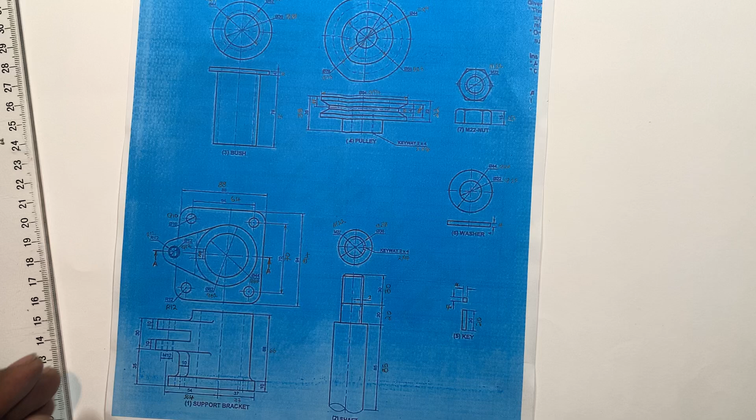We are still on grade 11 engineering graphics and design. So one of you guys sent us this problem, so I did try to print it. I'm replying a little bit later because I was struggling with the dimensions, as they are not clear enough, but I've managed to get them.

So this is it. Even the question, my sister, you didn't send us the question, you just sent us this one. So we'll assume, and according to my own experience with this particular one, it's going to say draw a full sectional front view as well as the top view, and this one is given in third angle orthographic projection.

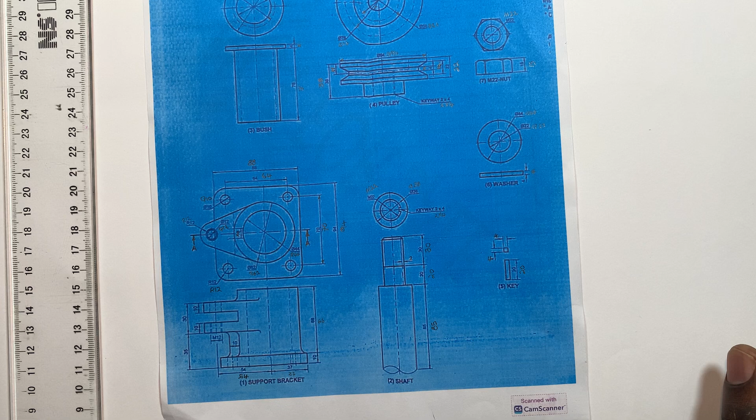Which means the top view is going to be on top of your front view. Are we together? So we have to assemble, and after assembling, we draw the outside top view. When you are drawing this, it is advisable to draw them simultaneously. Understand? Your work is going to be simple when you draw them out simultaneously.

So how am I going to start? I'll simply start with the horizontal construction line like this, our starting point, just the horizontal somewhere here. Just somewhere here. And then from there, you can just get the vertical center line.

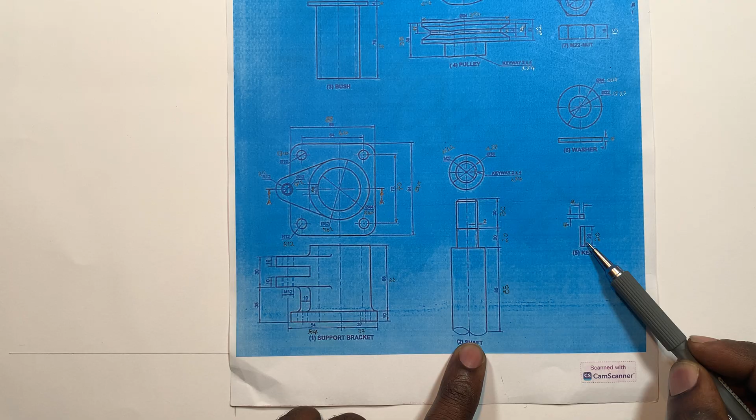So we are given the front as well as the top of item 1, which is the support bracket. Item 2 is the shaft, this is the front, this is the top. Item 5 is the key, this is the front, this is the top. Item 6 is the washer, this is the front, this is top. Item 7 is the nut, this is the front, this is top. Item number 4 is the pulley, which is the top, which is the front. Number 3 is the bush, which is the front and the top. You understand?

So we are going to concentrate on the front for the front view. Which means when you are drawing the front view, this is the one that you're going to draw, this is the one, this is the one, this is the one, this is the one for the front view. For the top view, we'll be drawing this one, that one, this one, as much as you can hear the word top view. So now we are going to start by drawing this front view exactly the way we see it.

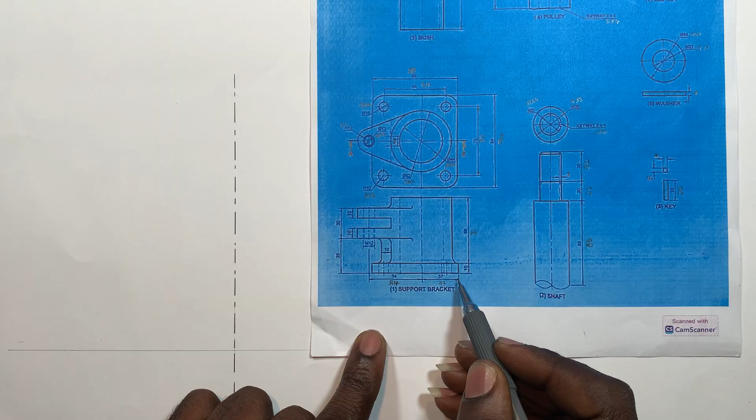And then, like I was saying, this vertical center line is this one. So from the vertical center line towards your right hand side is 37. Yes, so I'm going to record 37 from here to this side. So 37... 35, 36, 37 is right here. So 37 is this one, isn't it? Where my 37 is, I can just have a vertical construction line, faint, like this.

Then now from here till here, 54. 55, I'm looking for 54, which is this one, from your center to this side. There's my 54, isn't it? So I can just have a vertical construction line again. Okay, so double check this 54. What does it give you? So you have to be careful, my friend.

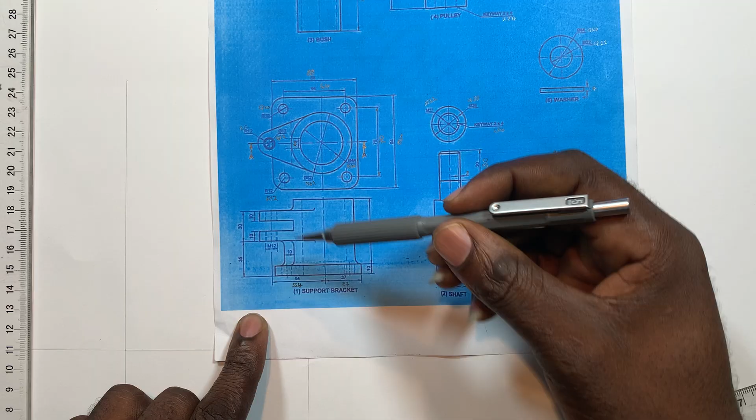What does this 54 give you? It's not giving you this one from here till here. So it's actually giving you the center of this. It's actually giving you that center. So be careful of that. It's giving you that center. Are we together? So from here till here is giving us what? That one.

So in order for us to get this point from here till here, so that we can even draw our base solid now, we have to come and say from where your 37 ends, which is this one, isn't it? Then record 88, which is that one from here till there. So be careful of that.

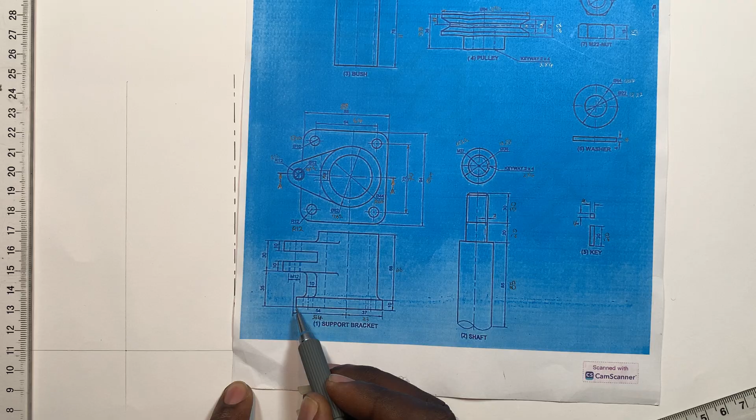You understand? Let me repeat, this 54 is not actually from here till here, it's actually from here to the center. The center of what? The center of what we see in our top view. Are we together? So the dimension from here till here is where your 37 ends, and go back with 88, which is being given on top of there with 88. So 88.

This is 88. So I'll mark it as 88. Then I can have a vertical constructional line.

This means now I can have this one solid. From here till there, as much as I can see, it is solid from here till there. Remember, this is an assembled drawing.

Now I can go up with the thickness of 10 millimeter. You can see 10 millimeter. So go up from here. There is my 10.

Once I get to the 10, just have a horizontal constructional line and solid here from here till there, and from here till there. I believe I will have to erase here because there is something that's supposed to be fitted in between.

But for now, let's continue with the shaft. So we are drawing the front view. Firstly, approach by drawing the skeleton, the outer part of your item 1.

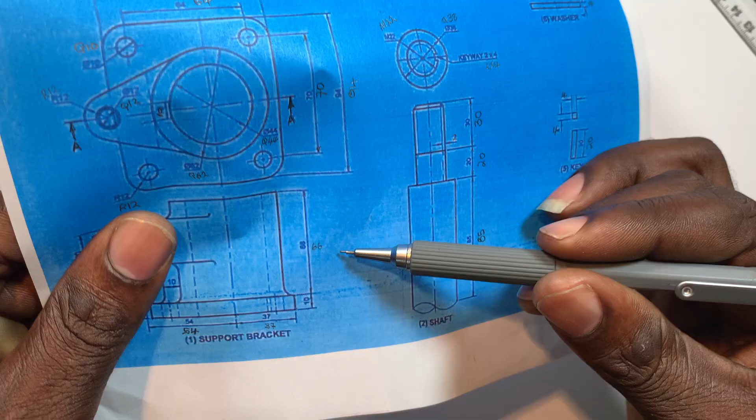So where are we? We are right here. So from here till here is 10 millimeter. Where 10 millimeter ends begins 66. This is 65, 66 is right here.

This is 66. Where my 66 is, I can then just draw the horizontal constructional line right there. Then after that...

What's going to be fitted here is going to be 66. Then what's going to be fitted here? If I'm having this diameter, remember I normally say you correspond to the dimension as well as the shape.

To say this part indeed is fitting there, you firstly look at the shape of that particular item you want to fit into that other one, and you confirm with its shape. So what's going to be fitted here?

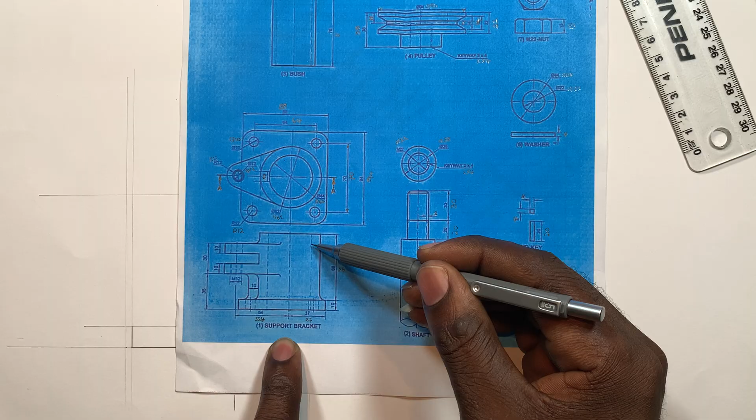Remember, if we were to just draw the front view, the sectional front view of this item 1, this was going to become dark, this one was going to disappear, this one was going to disappear, this one will be dark, this one will be dark.

These are hidden details, isn't it? From here till there, it's going to disappear. From here till there, it's going to disappear. So you don't even draw those ones that will disappear.

By tracing the cutting plane of AA, this one will disappear, this one will disappear. So this one will be dark, this one will be dark.

Then my question was, what is it going to be fitted there? It's going to be item 3. Item 3 will take the front view of item 3 and come fit it right there. So let's confirm with the dimension of item 3 to say indeed it's going to fit there.

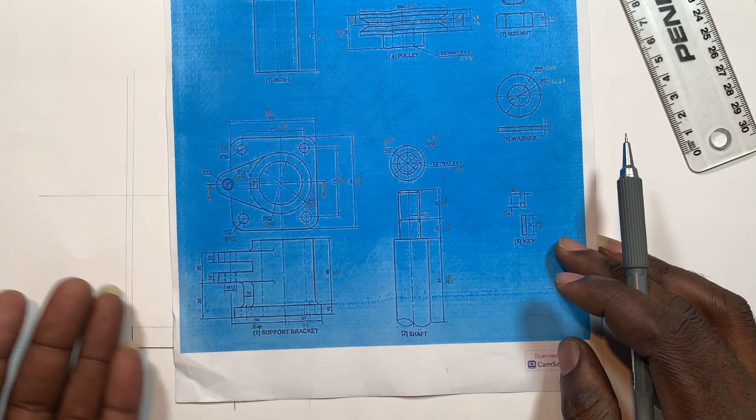So the height from here till here is 76. From here till here is 66 plus 10, which means 76, isn't it? So indeed the height of item 3 is going to fit there, because from here till here, the height of your bush is 76.

So from here till here is 66 plus 10 millimeters, which means 76, which corresponds with that. Are you following? So that is why I keep saying 2 or more things must agree with you to say indeed it is fitting. Okay, how about the internal diameter of this one?

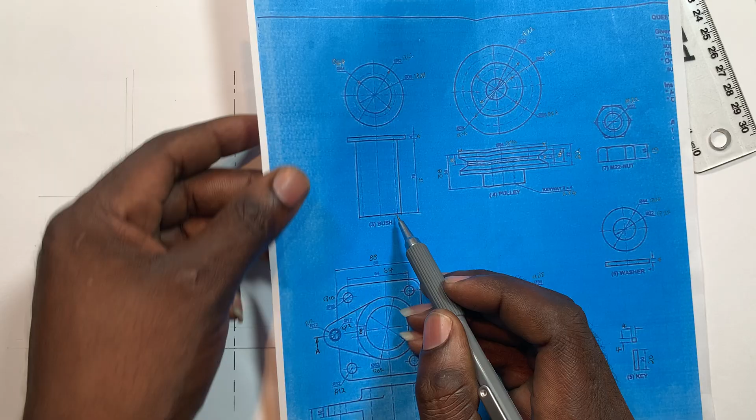So from here till here is diameter 44. So in item 3, do we have diameter 44? From here till here is how much? It's that one that is in hidden, which is the same 44.

Indeed, item 3 fits into item 1. So that's how you approach assembly drawing. If it's like that, then double check that 10 millimeter.

That's not 10 millimeter, it's 4 millimeter. So that 4 millimeter is going to be above, it's going to be above. Which means I can then say this is 5. I'm looking for what? For 4, which is this one. So where is my 0?

It's that one. So I can just have the horizontal constructional line. Then after that, this one from here till here is which one? Is going to be that thickness, or the head of our item 3, the head of the bush, isn't it? So it's of a thickness of 4 millimeter.

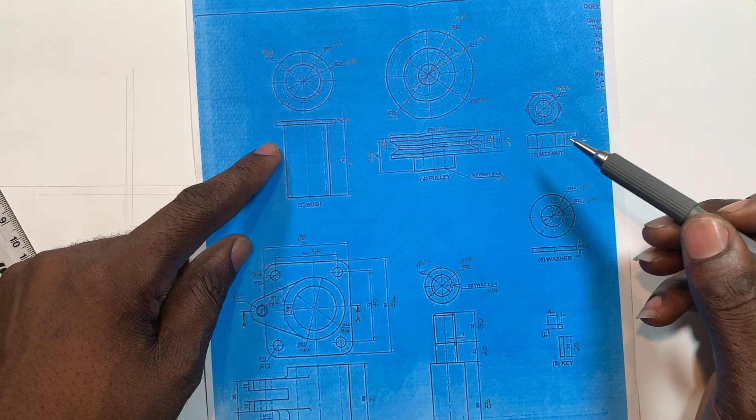Okay, so what's going to be placed on top of that? It's going to be our item 4, into 3. So we'll be taking the front view, isn't it? So the height of item 4 is 38. From here till here is 38. So which means I can record the 38 right here. This is 40, 39. I'm looking for 38, which is that one.

That one, so then I'll just mark it 0. This is 0, and then I go horizontal. If you double check, or if you notice now, we are busy dealing with the horizontal dimension.

We want to get the correct height of the whole assembled part of item 1 - I mean, of the front view, so that we'll then draw the top view together with the front view simultaneously. So what's going to be fitted there now in item 4?

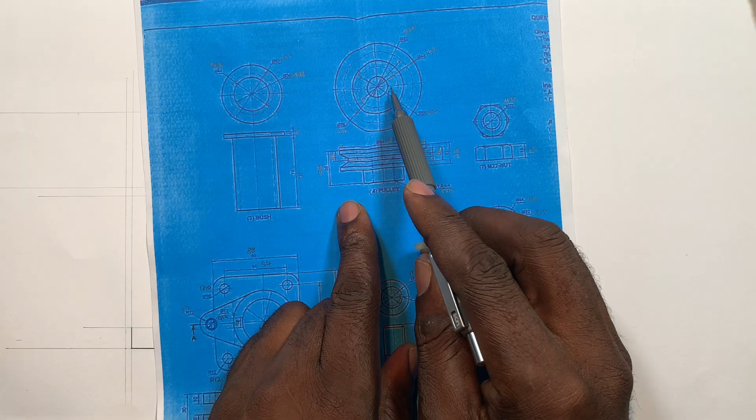So remember, if we cut like this item 4, we put the cutting plane here. So from here till here, it will disappear - you don't even draw it. From here till here, it will disappear, from here till here, it will disappear, from here till here, it will disappear.

Understand? Like as I was saying, this one from here till here will be dark, dark, dark - remember, it's hidden. So guys, if you are sending us a problem, make it a point you are sending us a clear picture, so that we don't struggle with a lot of dimension and hidden lines.

You understand? Okay, so now when we put there, there is a washer. The washer will be fitted in there, and then on top of the washer there will be a nut. So the height of the nut, from here till here, is what?

Is 38, isn't it? So from here till here, at 38, I can just let me extend this vertical center line of mine. And then where is my - let me put 40, or 30 - let me put 35.

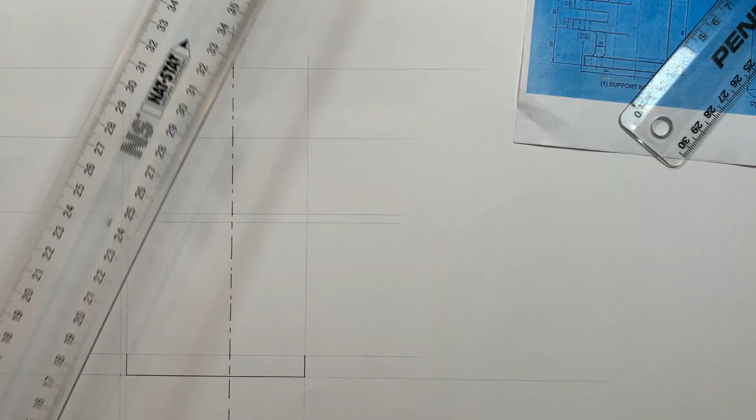So there's my 35. Then on top of where my 35 ends begins my top view. So this is my 35. So now on top of this 35, where my 35 begins, begins my top view. So let me just have this vertical center line extended just a little bit.

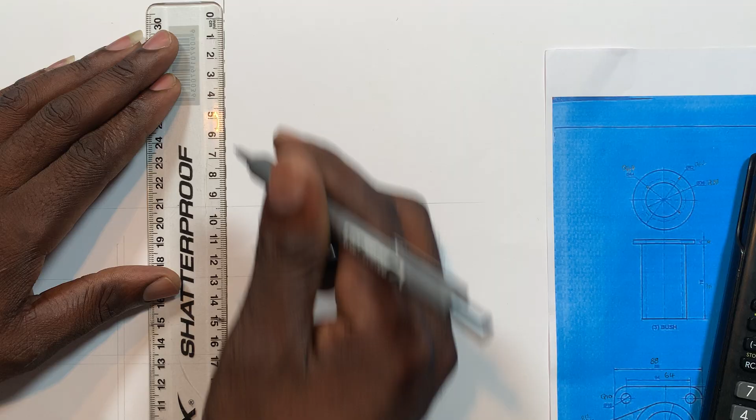Okay, so now what can I do now? I will then say from here till here is 94 millimeter. When you say 94 divided by 2, we are getting 47, isn't it? So 90, 90, 95, this is 94. Then I mark at 0, then I mark at 47.

Then I can have the horizontal constructional line and the horizontal center. Okay, so like as I've said to you, we will be drawing them simultaneously. So from here till here is 94, which is from here till here. Understand? So I can just extend this line of mine faint like this, as well as this one faint like that, as well as this one faint like that, just extending them till there for my top view.

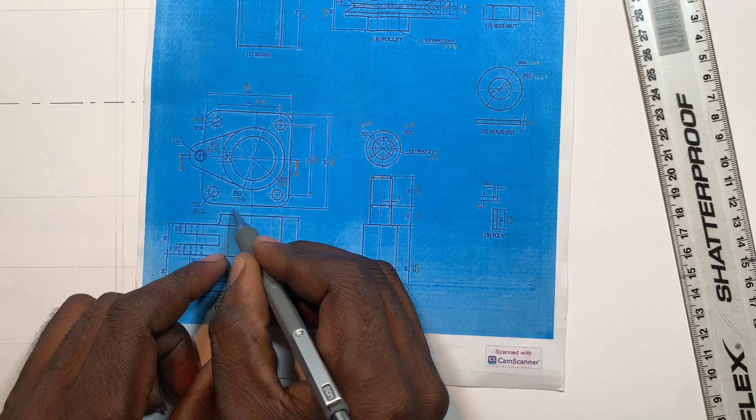Okay, so now I'll draw this outside part of my top view, and double check this one. So this one tallies with that, isn't it? Okay, so which means now I can have this corner here and here, which is here and here.

So what they said is radius 12, radius 12 - this one is radius 12. So which means if I'm saying 12, 12 times 2 is 24, isn't it? So if I'm having this stencil ruler, I will just select diameter 24 here, which is this one, so that I'm fast and accurate.

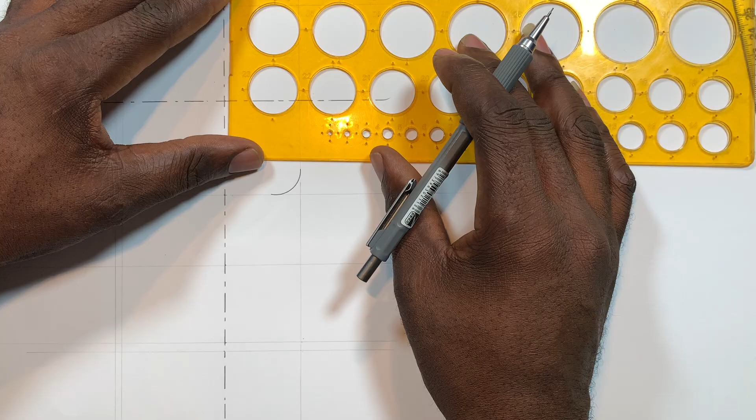Diameter 24. So I can use solid here. They said is what? Radius 12 millimeter, isn't it? So that is why when I'm using this method, I have to look for diameter 24. So I can have this one dark from here to there, and from here till here now.

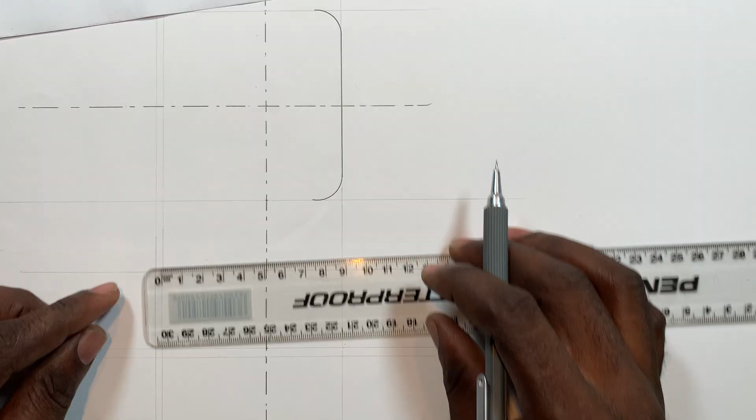Okay, so now after this one, where are we? So we've already gotten this one. Now about this one, we said from here till here it's 88. Did we get the 88? Yes, this is the 88, isn't it?

So which means I can also select the, it's broken, eh, diameter 24 as well. Where are you? 24, you are right here. So from here till there, and from here to there.

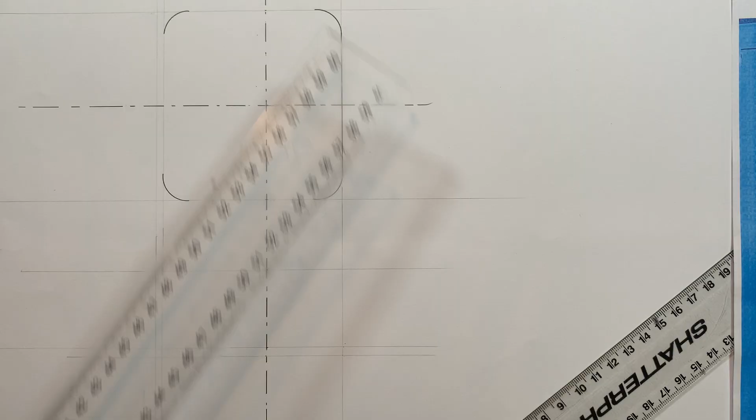So good people, you have to be careful, not this one. Remember which one is this one. This one is where your 54 is ending, from here till here. Your 54 is ending, isn't it? So which means now I can have this one dark from here till right there, and from here till right there.

Okay, so now let's go. So I cannot draw this one dark yet from here till here because there is something happening there. Remember, you saw it is still part of your item one. This one is still the part and parcel of your item.

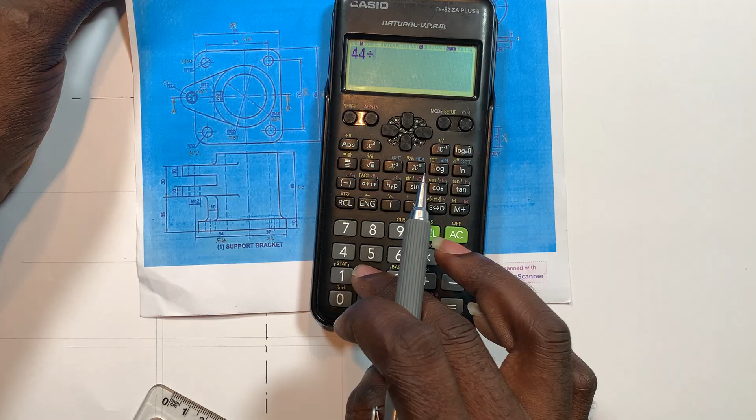So now I can then draw this diameter so that I'll project these lines down so that I then get the top view of it. So from here till here is diameter 44. So if you say 44 divided by 2, you are getting what? You are getting 22, isn't it?

So take my drawing compass, take this one, open it to 22. This is 22. There's my 22, right? Then I'll come and place it here and draw this one faint for now. Draw it faint for now because you don't know yet what's going to happen on it. Is it going to be hidden or is it going to be dark? So firstly draw it faint.

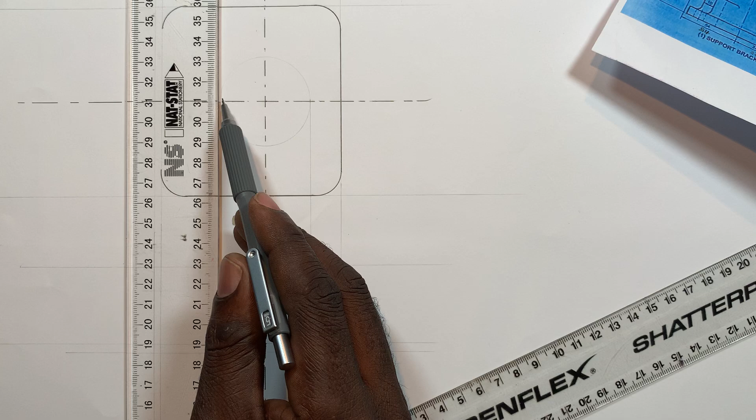So after I've drawn this one, then project it vertically down towards your front view. Remember, our focus is on the front view in general. So there it goes, project it towards my top view, from my top view to my front view. So which one is this? So it passed through our bush, which is item 3, from here till there, from here till there.

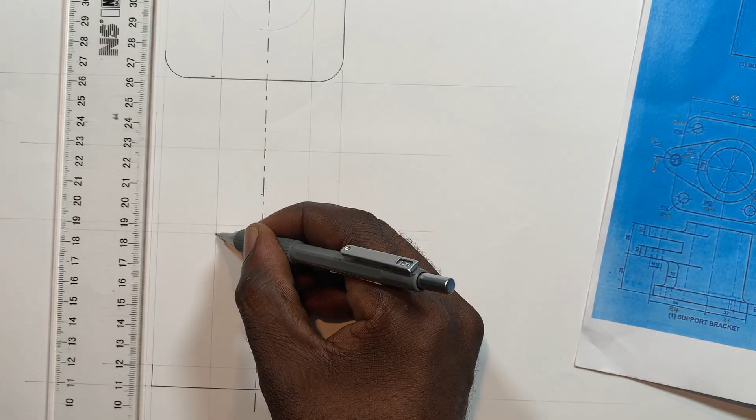So which means I can have this one dark. Remember, from here till here is which one? Is that one of 66. So which means I can have this one dark from here till right there in my front view, and have this one from here till right here in my front view.

Okay, so now let's go. Which one is this one? It's this one from here till here, because this is the 54, which is this one. So which means, in other words, this one has already become dark. So what is your drawing? You are also analyzing the cutting plane so that those lines that will disappear, you don't even draw them like this one.

Okay, so now what is going to happen now? So I cannot draw this one dark yet. Double check what is happening here. You understand? So which means I will have to go back to my top view and get that one. So this one is diameter what? 62. Number one is 62.

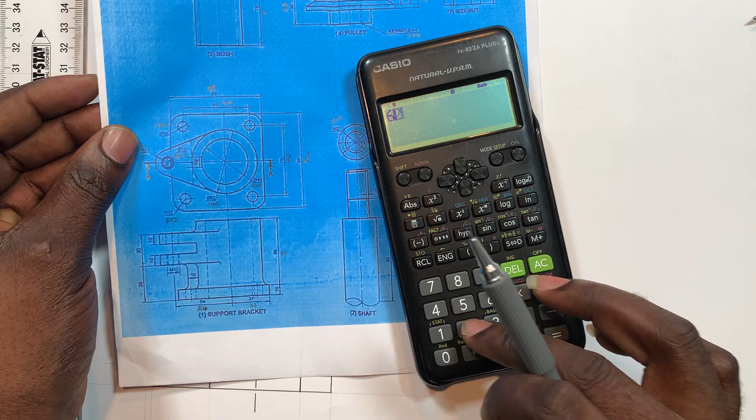So if you say 62 divided by 2 is 31, isn't it? So 31, open your drawing compass to 31. Place it at 0, and where's my 31? This is my 31. So now come to my top view, and I'll also draw it faint for now, because I'm also not quite sure what is happening there.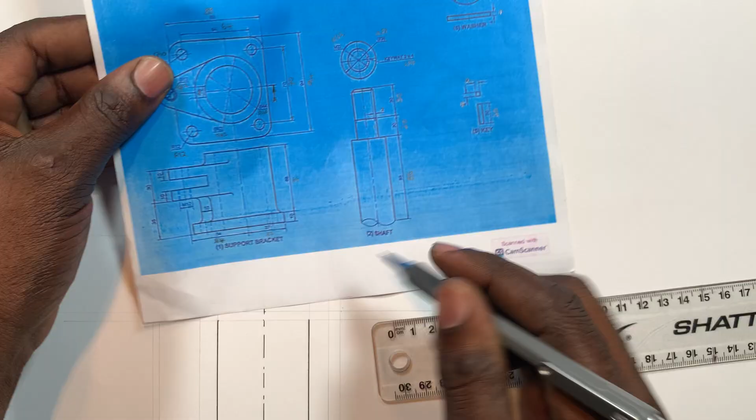After I've drawn it faint, I can now just project this one, because our aim is to finish first with our front view and section it, then take this one down faint. You understand? So which means I've already gotten this one. I can now have it solid from here till down here. And double check there, it's not a sharp corner. Since it's not a sharp corner, we are going to use this type of corner, like this.

From here till there, align it nicely. So from here till there, have it solid. This ruler of mine is old now. Okay, like this.

So now I can have this one dark here, from here till right there. Which one is this? Is this one from here till there? So from here till there, it's supposed to disappear. Like I said, from here till here, I think we're too forward to draw it dark. From here till here, we have to erase it.

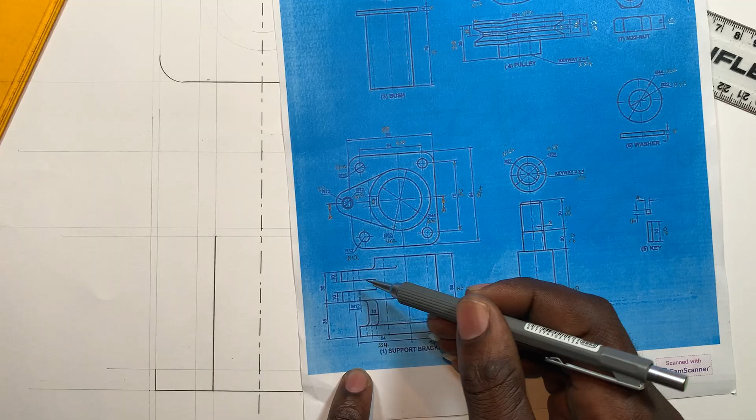Okay, so now let's approach to draw this other side now. So from here till here, which one is this? Is this one from here till here? So I can have it solid as well.

From here till right there, I can have it solid. And then now I'll go down from here till here. What is the dimension for it? This dimension will automatically come out by itself.

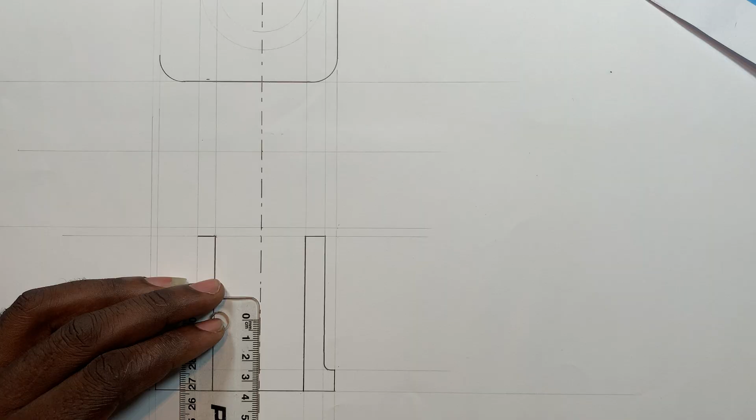So we'll have to go back to our starting point, isn't it? Which is set from here till here is 35. Starting point in the base, 35. This is 35, there is our 35. And then I can just mark it 0, just mark it 0 like this. Then get a horizontal constructional line.

Then after the 35, I can then record the 30. I record the 30, this is a 30. Then I mark it 0. Then the set where your 30 ends, so go back with 10 millimeter. And where your 30 started, go up with 10 millimeter. So I mark at 10. This from here till here is 30, isn't it?

Then 10 and 5, 10 and 10, this side. So that you can just get their constructional line horizontally, simultaneously. So there it goes, there it goes. Okay, so now, which means I can have this one now, and I can have this one now.

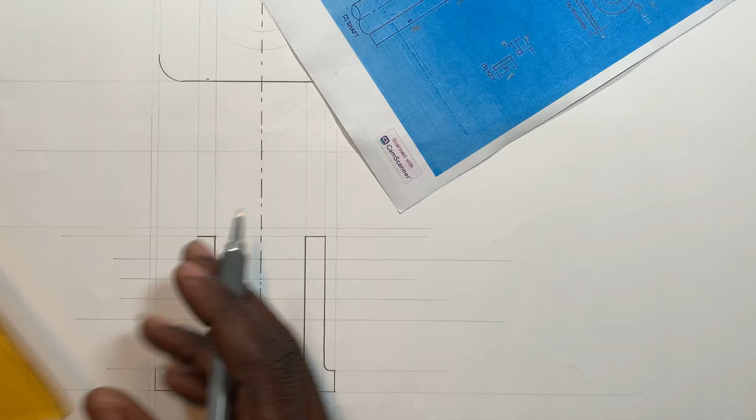How's this? Then I can have you solid. But then since on the side I'm not quite sure what is happening, I'll just draw it a little bit like this. And this side, the bottom part, it's a sharp corner. I'll just draw it just a little bit short for now. And then even this one, it's a sharp corner. From here till here, it's a sharp corner.

Which is this one from here till here? As you can see, it's a sharp corner. So even this side, it's a sharp corner, this one. So I'll draw it just a little bit small for now, isn't it? Then when you go down, it's not a sharp corner anymore. So I have to align it nicely.

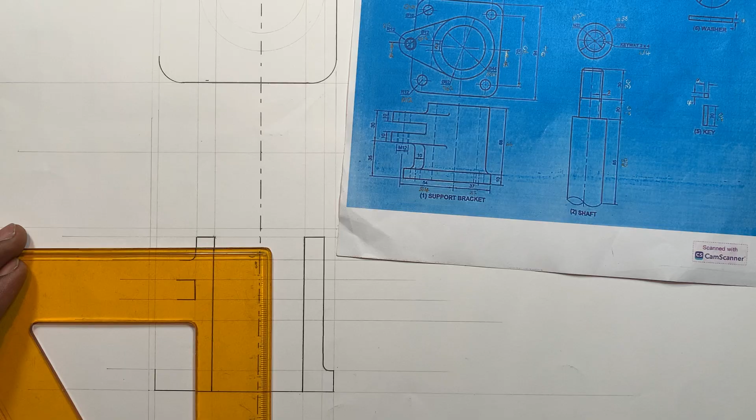So I'm drawing during the night. The shadow is disturbing me.

Just a little bit like this, my friend. And then the bottom part down here is also not a sharp corner. So there it goes, just like this. There we go. Okay, so now we've already gotten this one.

So as you can see, there is that supporter. That supporter, they said, is what has a thickness of 10 millimeter, which is that one in our top view. So I can just record the 10 even right here. There's the 10 millimeter. Then project this one up.

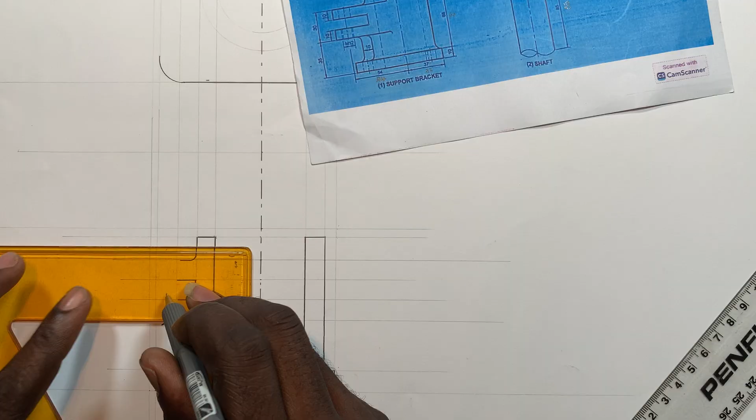This is it. Then I'll get to the bend as well. Get to the bend. Have to align it nicely. Make it a point that is properly aligned.

So my shadow is disturbing me. So that goes just like this.

So I've already gotten this one, and that one. Okay, so just have this one.

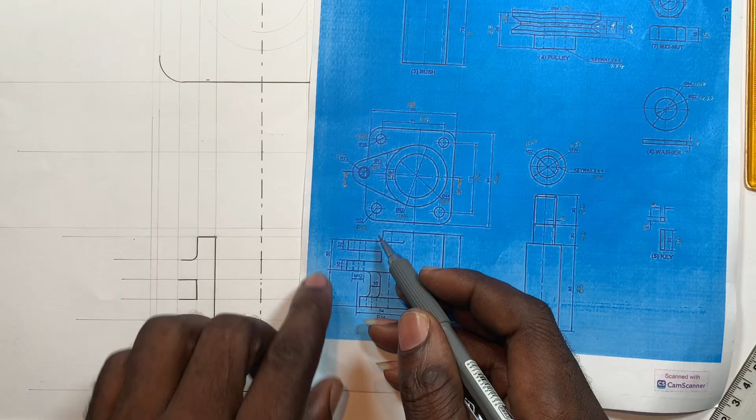So my friend, there at 54, they said thereby on top there is a diameter of 12 millimeters. So this is radius 12, this is diameter 12. So 12, which is 6, isn't it?

Can I get the radius 6 with this one? It's too small. Let me just select this one so that I select diameter 12.

There it is. Then I'm going to align it on this line where my 54 is ending, as well as my horizontal center line, and have this one dark.

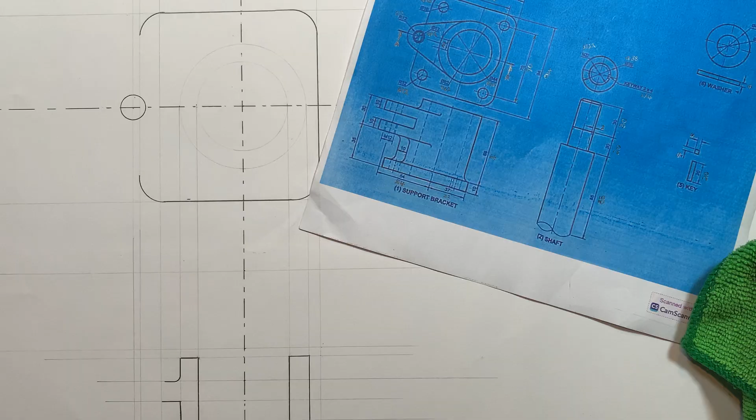So now I'm going to open my drawing compass to 12 millimeter. This is 12 millimeter. Then I come and place it here and just draw this one faint. Draw it faint.

Just like this, understand? So from there, I can take my drawing compass and join the circumference of the bigger circle. Copy this exactly the way you see it. So the circumference of the bigger circle, with this one that you just drew now of radius 12 millimeter. In mathematics, they call this type of line what?

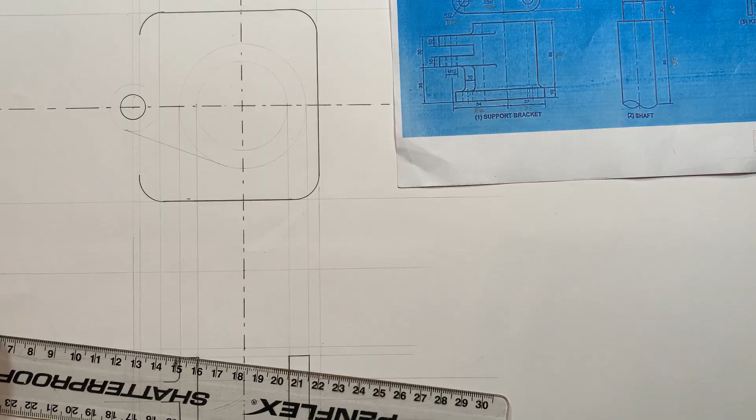Tangent. So draw it faint like this, and a tangent on the other side again. It's supposed to just touch these circumferences of the circle.

So draw them faint for now, because you don't know what's going to happen. Remember, this is the top view of it, so everything is faint for now, especially the inside one, because there are some other parts that are supposed to be fitted.

So once I get this, I can now take that point vertically down. The moment I take it vertically down like this, it will give me a what? That one, to say okay, this one I can have it solid here, and this one I can have it solid right there. Understand?

So then also take this point down and take this one down again. So it's going to be solid here till here.

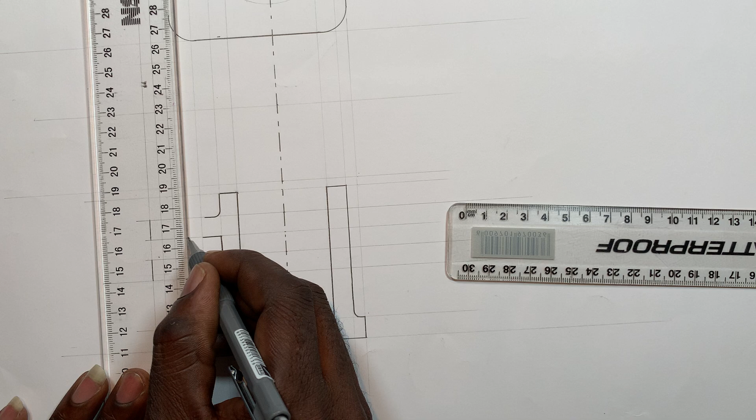Remember, it was hidden. So which one is this one? From here till there, hidden is now solid. It was hidden, is now solid. You understand? So I can get a clear picture to say okay, from here till there is solid. Now I can understand to say it's ending right there.

Just like this. After you've drawn like this, we are done with what? With the front view. And double check this front view. It has got internal thread.

So this internal thread is going to be, if this is diameter what? This is diameter 12. So this one is going to be diameter 10. The internal thread. So it's not supposed to close in there, isn't it?

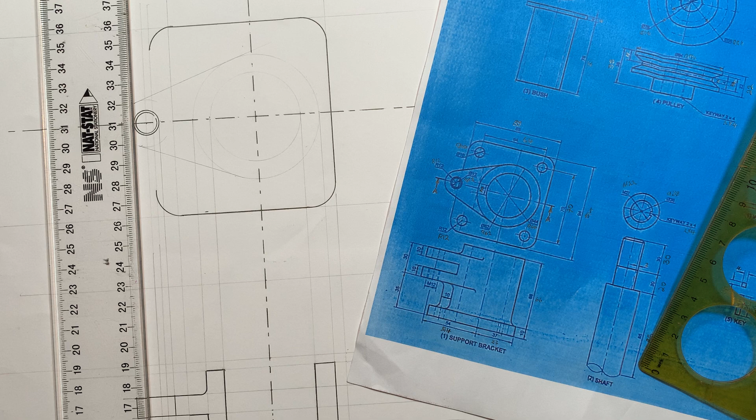So now project it down, but then it's the bottom one that is going to be having the thread. Again, what is happening here is the bottom one that's going to have some thread. As much as you can see it there, this one's having a thread there, internal thread, but on top of there. Which means when you put the nut here, it will just run through. But once it gets to the bottom one, it will start screwing, or it will start fastening. You understand that?

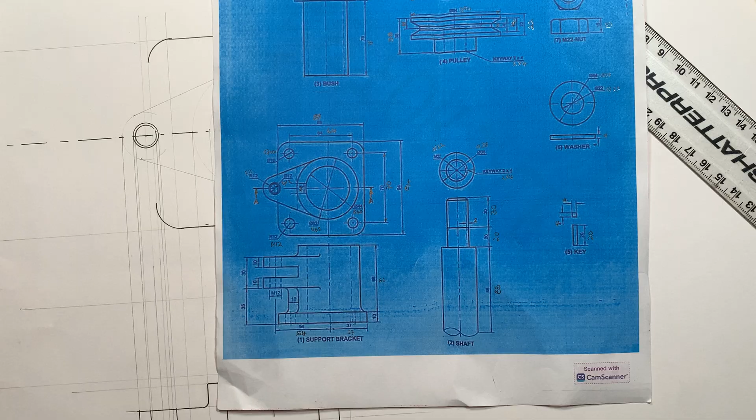Okay, so we are done with what? With the front view. We are done with the front view. So let's double check the what now.

What is going to be fitted there, as we've analyzed, is item 3, which is the bush, and that thickness of it we've already dealt with. The thickness of it, which is 4 millimeter, which is this one from here till here.

So the outside diameter from here till here is what? Goes from here till here is the 38, which talks about that. Talks about this one from here till here. So that one that is hidden, from here till here, is diameter 44, of which we've already dealt with it here. We've already covered it here, isn't it?

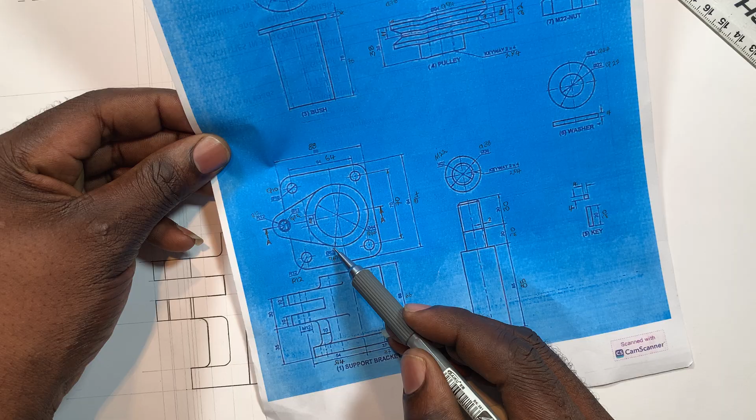So this one from here till here is 62, isn't it? It is diameter 62. So this 62 tallies with what? With this one, 62 from here till here, in our item 1.

As I've said, two or more things must agree with you. So if it tallies like that, from here till here is 62, which means I can have it up like this. The moment I'm extending this one from here till here, it's good as if I'm now extending this one from here till there. And even this other side, from here till here, supposed to be in the same line, is as if I'm from here till right there. Just like that, just like that, just like that.

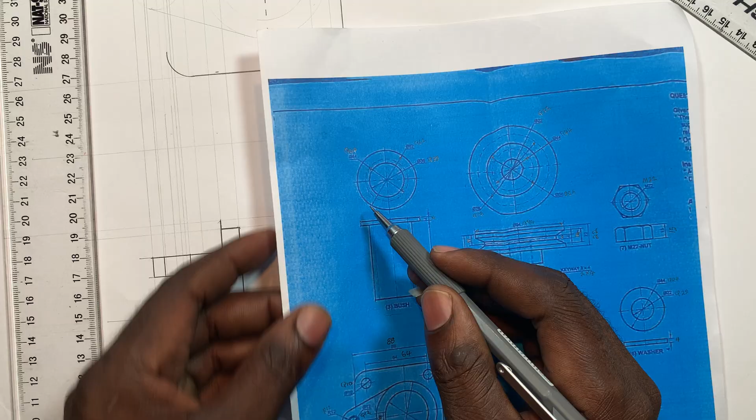Okay, so now the inside diameter is going to remain this one from here to right here, from here to right there. So the inside diameter is 54. This 54 must correspond with this 54. Where are we having 54? This 54 is the internal diameter of this bush. Double check, that is the internal diameter of this bush.

So what will be running through this bush is item 2, which is the shaft. So which means this 54 is the outside diameter, which is this one from here till here, which tallies with that one in our item 1, from here till here, 54.

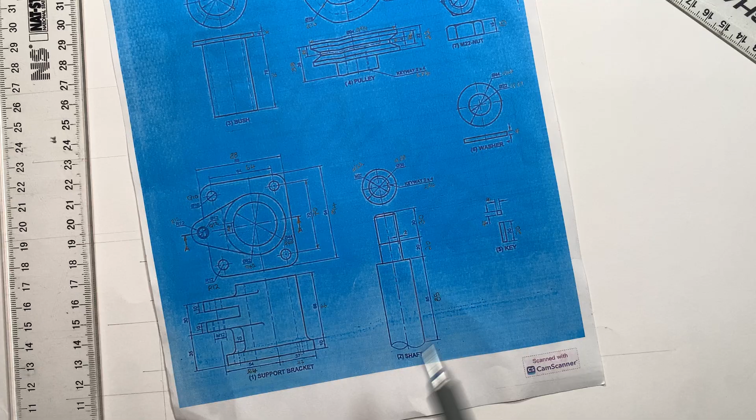Okay, so go inside now. From here till here is 38, which is this one from here till here, which will tally with 38. As we are saying, what will be running through your item 3, which is the bush, is your shaft. So correspond the inside diameter of the bush as well as the outside diameter of the shaft, which is 38, isn't it?

So now if you say 38 divided by 2, you are getting 19. So open the drawing compass to 19 millimeter. From here, there is the 19. This is 19, eh?

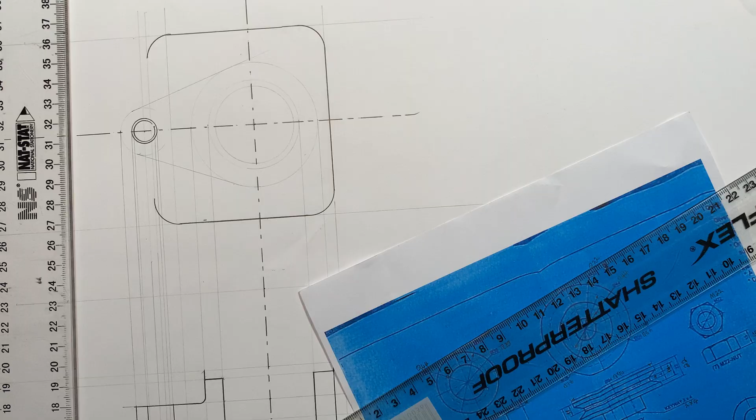Then from there, come and place it here. So I'm drawing it faint because most of the time the question will say no hidden details are required. So what I'm drawing here is supposed to be hidden, but the question will just say it's not necessary. So should you draw them, they are not going to penalize you. Should you not draw them, you are still on the right track.

Okay, so now after I've gotten this one, project it down, because our aim is to finish up with the top view. So there it goes down, which means in my front view I can have this one solid. Do you see that it is now passing my item 1? Because the true height of item 1 is actually starting from here till there.

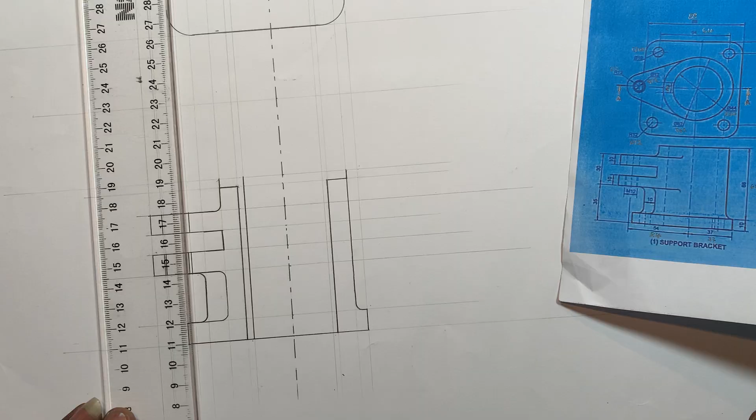But double check, it's also accommodating that thickness of 4 millimeter. Double check it, look at it, it starts actually from here till down there. So that is why it's not going to stop here, it will go further up. So do the same thing even on the other side. This goes down. Then once it gets there, I can have it solid from here to pass it till right there.

So as I was saying, from here till the solid, do you see it's passing this one, which is passing that one. I'm now drawing, which means I can have this one solid, solid right here and solid right there.

Okay, so now let's go. Now where are we? We're done with item 1. Item 3 fitted in item 1, done with it. Remember drawing the top as well as the front.

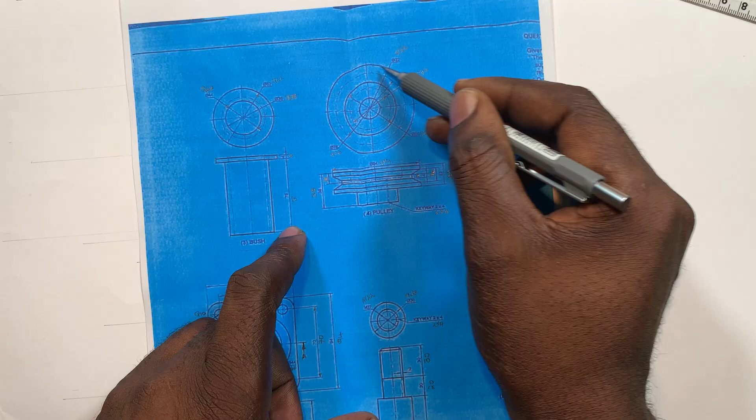So now we can then align item 4 on top of item 3. If I'm saying align, sticking on the vertical center line, remember we're drawing this one, isn't it? And the top of item 4 is the outside diameter, is the one that will then see it clearly. Remember on our top view we've been drawing everything faint there, but now what we are drawing is going to be solid.

Okay, so from here the biggest diameter there is supposed to be 94, which is from here till here, isn't it? So if you say 94 divided by 2, that's 47. So open your drawing compass to 47.

This is my zero. 45, 46. I'm looking for 47, which is right there. So be careful, it's supposed to be exactly 47, not 46.5, not 47.5, but exactly 47.

This is it. Then now I'll come and place it here at my reference and have this one back from here till there. You see how accurate we are? Very accurate. If I'm saying very accurate, double check what is happening here. So it shows that we are accurate.

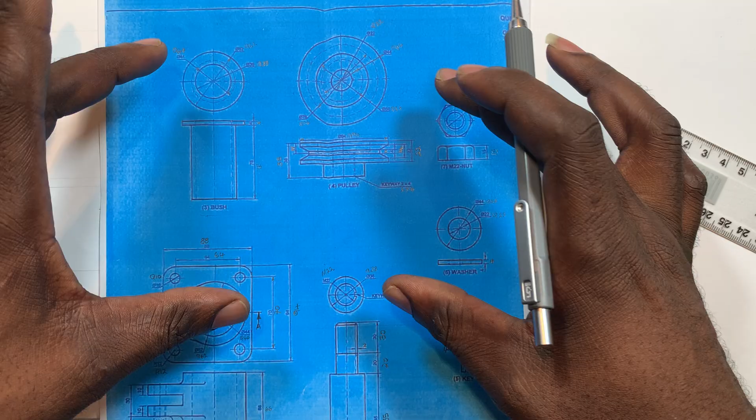Okay, so we just draw this diameter, diameter 94, isn't it, which is the biggest diameter, which is this one. I know it's not clear enough, you understand? So if I'm pointing diameter, you might not see them. That's why I don't alter any line without talking about it or saying its dimension, because I know you don't see, it's not clear enough. So in other words, this diameter is diameter 94, which is from here till there. Diameter 94, everyone can see it, diameter 94.

So if I've drawn this diameter 94, do you see what is happening here? So from here till there, which means I have to erase it. It's going to be how? It's going to be hidden.

Am I right or wrong, Kenneth? I know I'm right to say this one is going to disappear. Let it disappear, Kenneth. How? Like this. Then you are going to have it as what? As hidden. So draw it as hidden. Why? Because it's under. You understand? So it's under.

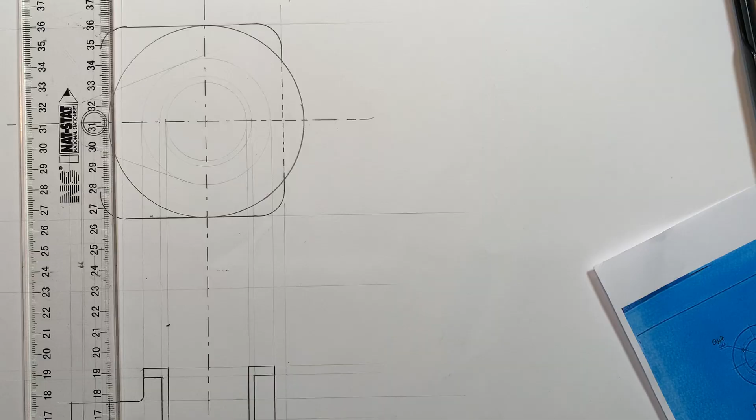So since I'm now having this one like this, I can then have this one, take this point vertically down. It's a constructional line. Remember, that is now going to be which part? That part, isn't it? And then take the other side, be careful. So it's gonna go vertically down. So just mark here and mark right there.

And then after I've marked like that, remember this line was just put to say we assume our complete assembled part of our front view can end there. So should it go beyond, be above, we'll just erase it. Should it stick below, we'll just leave it like that. So we just got this one.

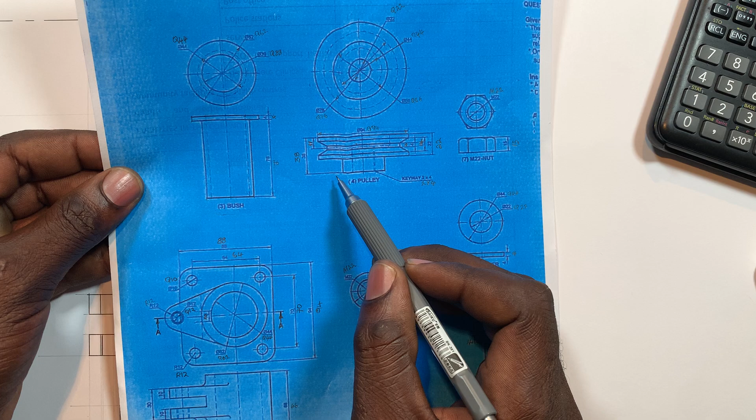Come, what did I say to you? I said we are aligning item 4 on top of item 1 on top of item 3. So that is the height of it. So from here till here is 38. That's when I can record the 38, Mr. Kenneth, whether from here till up there, the 38.

This is 40, 39, 38, is that one. There is our 38, where is it ending, isn't it? Okay, so it's ending on that line. So if it's ending on that line, what is going to happen now? So where my 38 ends, I can go back with what? With 11 millimeter. Do you see? The set from here till here is 11 millimeter.

And that 11 millimeter is gonna give me the horizontal center line of my pulley, item 4. This is 10, there is my 11 there. So then I can then draw the horizontal center line of it. There it goes.

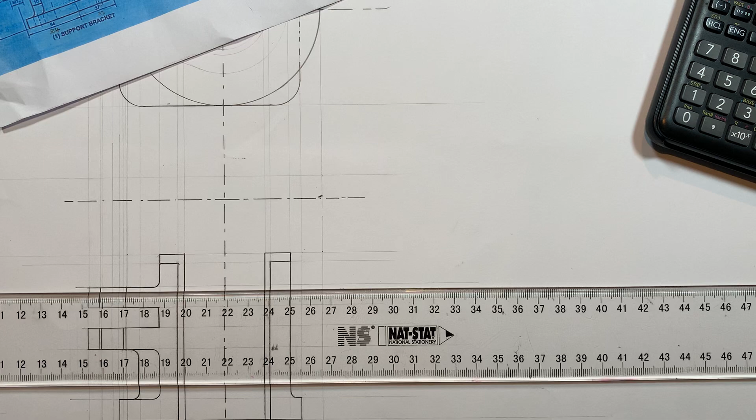I just want to get this pencil finished. I'm tired of them, actually. I cannot throw them away.

You understand? Okay, so now, since I'm now having from here till 11, it's actually giving me the horizontal center line of this pulley, isn't it? And then from there, now I can then say, is it what, 4 millimeter? So I can say 2 millimeter, 2 millimeter. So you have to be careful. This is 4, this is 0, 1, 2.

Yes, so this is 5, this is 5. I'll just mark it 4 and mark it at 0. And then have a horizontal constructional line and horizontal constructional line. Okay, so I've gotten the inner one from here till here, 4 millimeter.

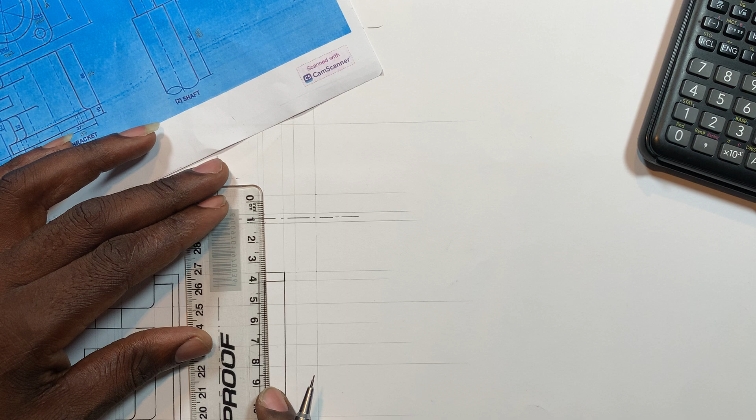Then from here till here is what? Is 14 millimeter, so 14 divided by 2 is 7, isn't it? So this is 5, 6, 7. This is 5, 6, 7, and then I mark at 0 and mark at 14. This is 15 and mark at 14.

Then also have the horizontal constructional line as well as the horizontal constructional line.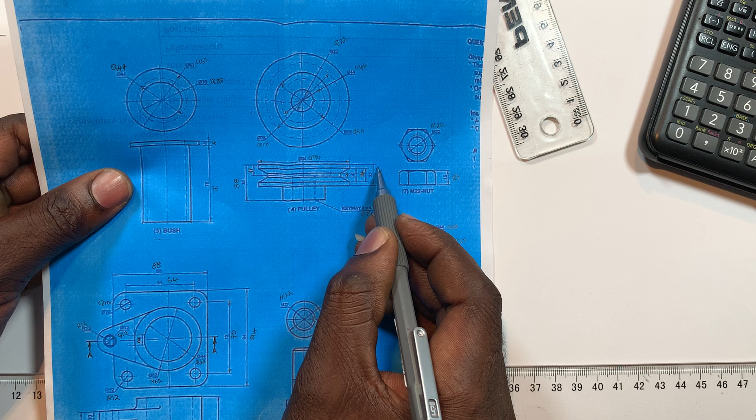So after that one, this one I've already gotten. From here till here is 22 millimeter. So that is going to give me this, 22 millimeter.

Let me see, there's something wrong here. If from here till here is 11, which is half of 22, isn't it? This is from here, this is 20, 20. This is 11, 20, 21, 22, which is this one. Okay, because this is supposed to be the same.

So from here till here is the 11. Then now, from here till here is this what? This 14. So if from here till here is 22, from here till here is 4, from here till here is what? Is 14, which means 7, 7.

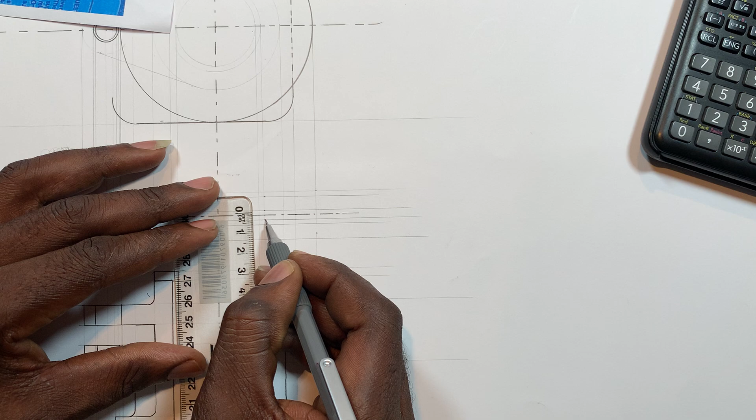Which one is incorrect? So the first one, from here till here is correct. Now put this one. It's this one that is incorrect. This one that is incorrect, first of all.

Then now I'm convinced, there it goes. There it goes. Remember, we marked right here. So which means from here till here, solid. From here till here, solid. How? Like this.

From here till right there, solid. From here till right there, solid. Which one is this one? Is this one from here till there, from here till there. So which means even this other side, remember, is which one? Is that one, isn't it?

This one, that goes, so it goes, which means from here till there, solid. And from here till there, solid.

So it's going to go just a little bit for now, since we don't know yet it's going to be that way. Okay, so now remember, I'll then have to just join with that one from here till there, from here till there. You understand? Which is from here till somewhere there, from here till somewhere there. How are we going to get that?

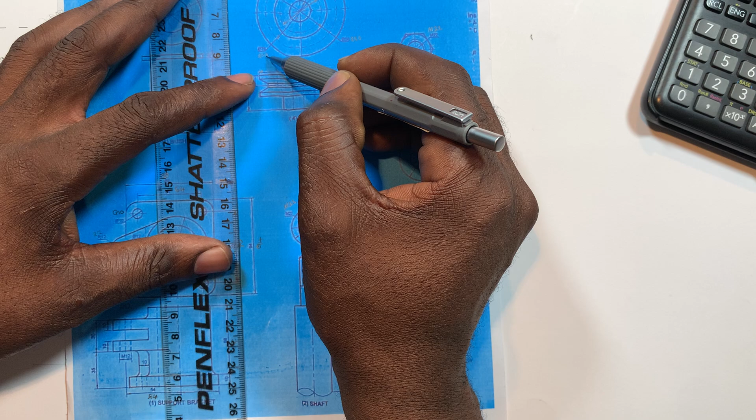Standing like this, so which means you must come back to get the diameter of it. From here till here is diameter what? Double check it there. Is the inner, which is diameter 90... not 90, 76. So 76 divided by 2 is 38.

So open your drawing compass to 38. This is 38. Then I'll go back to my top view, place it here, and draw it as hidden.

As hidden, like this. Then after I've drawn it like this, I'll then just take that one vertically down. So it's the one that's going to now guide me to say it's going to be dark right here, you understand?

And this other side again, project it down. There it goes, so dark from here till there. Which one is that one? Is that thickness of 4 millimeter. So from here till here is 2, which is 2, which is which one?

Which is that one, from here till here. You understand? So basically we are not looking for this, but we are looking for that one. Remember that this one, it will disappear. You don't draw it, it will disappear.

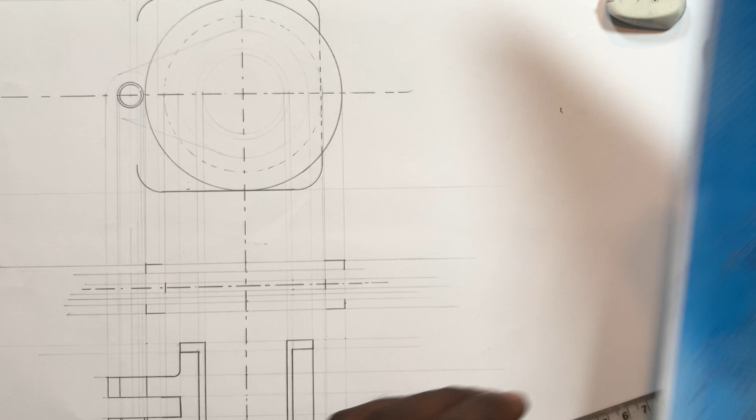It will disappear. So now you can simply take your 30 centimeter ruler and join this one with that. Join this one with that. We join this one with that.

This one. So I said I cannot draw them dark here, I cannot draw them dark here up until we start with the bottom part of it. So from here till here is diameter what?

As much as this is the top view, isn't it? So we are going to view it on its top, which means we have to get it as hidden there in terms of the dimension. So should it confuse you, just trace it like this to say, okay, this one tallies with that.

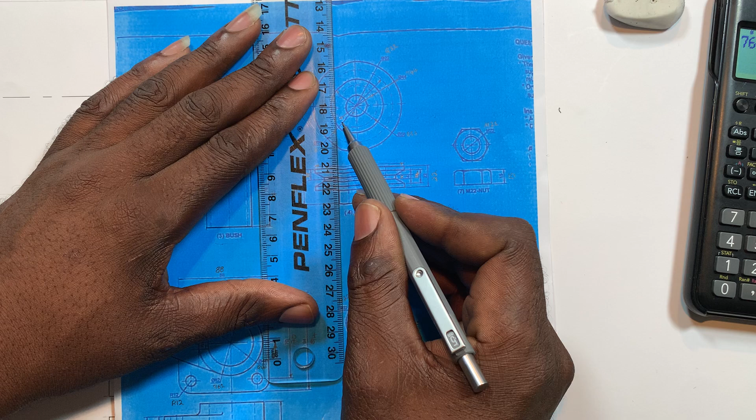So which means it's diameter what? Diameter 40... is diameter 44. Diameter 44. And we correlated diameter 44 on this side, which is from here till there. If you've forgotten it, just read it to confirm this is the 44.

This is the 44. You understand? So which means I can extend it like this from here till there, and from here till right there. I want just like this, so that I can now have a pure clear understanding to see from here to right there solid, from here to right there solid. I want solid like this.

So this part I already have it, I already have it. From here till here, already dark. From here till here, already dark. From here till here, it will disappear, can it? From here till here, it will disappear.

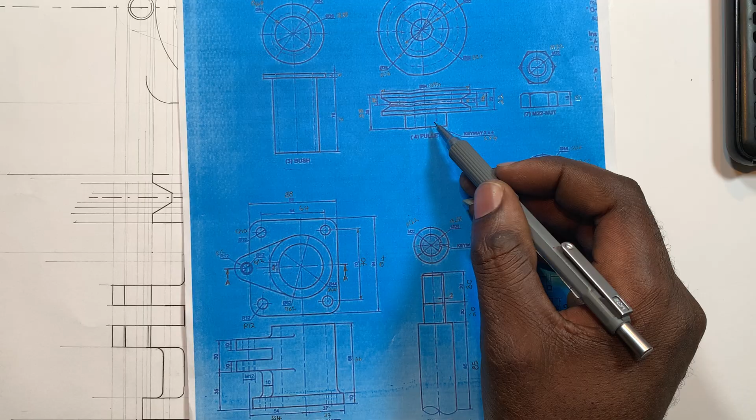Then this one is having internal, what to call, there is a two-dimension, two internal line here, which is hidden. So which corresponds with what you see in your shaft. Because there is a key that's supposed to be fitted there.

Okay, so now let's double check the top view of it. This here, this clear diameter, which is 56, diameter 56, talks about this one from here till here. So you're going to say 56 divided by 2, which is what? Which is 28. So open your drawing compass to 28.

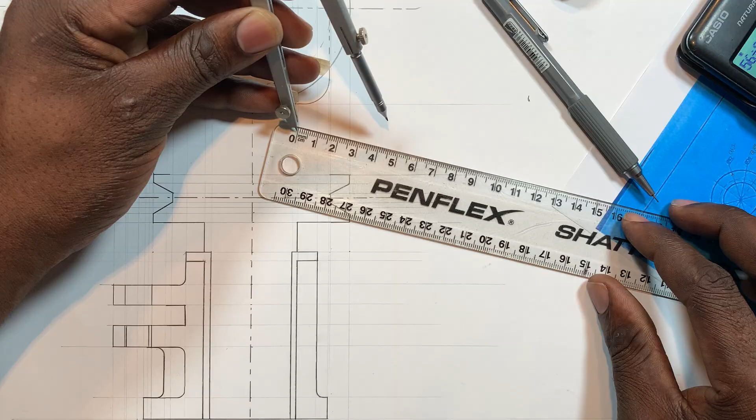28, this is 0. 28. There's my 0. Then 28, 30, 29. I'm looking for 28, which is this one.

28, right? Then now I'll come and draw it clearly there by my top view, because we can see that one clearly when you check on its top view. So it's going to be dark like this. We'll draw it dark like this. Then after you draw it dark, then you project this down.

So it's going to go down up to where, double check it. So it's actually hidden from here till at the center, from here till there at the center. You understand? So which means from here till right there solid, and then take it down, even this other side, that goes from here to right there solid.

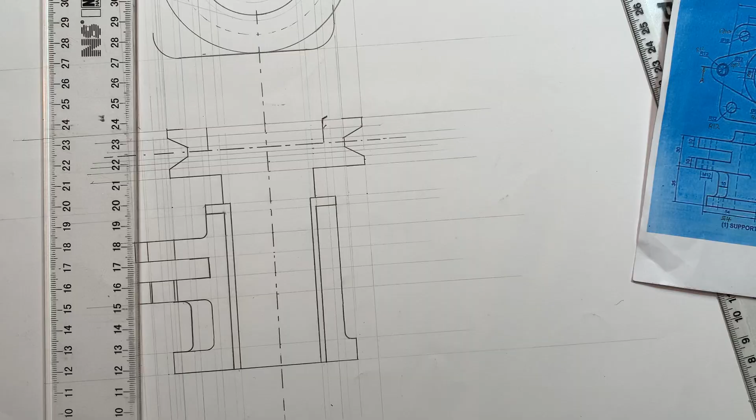Keeps on breaking. Let it break up until they are finished, this pencil lead. I don't like them, that is why I keep on repeating a line. You understand? Okay, so it's going to be dark continuing like this, dark continuing like this.

But remember that it's a center line, so be careful, it's still a center line there. So which means now I can have this one solid till where I'm having a clear understanding to say it's going to be solid till there, it's going to be solid till right there.

So even here, be careful that it's a center line, isn't it? But should it be like this, I'll advise you do like this, because now if it's solid like this, remember that it's just the center line. But should it be behaving like this one of mine, just erase it. It's supposed to be like this, because once it's like this, your teacher might be thinking of something else.

Just erase it like this, just like this, so that it's going to be clear, understandable to say it's not part of it. You see, I can even just a little bit there. Yeah, just like this.

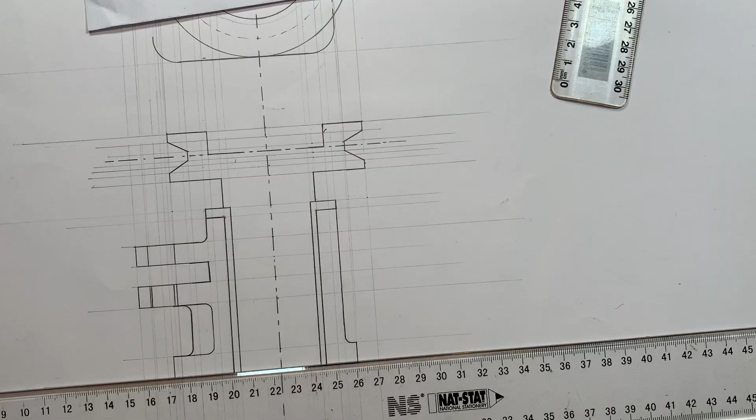So now where are we? Double check there that from here till there it's a center, it's a hidden line. From here till there it's a hidden line. So something there must disappear, but double check there, it seems to be a closed line. Okay, so we are going to solve that.

So what is the inside diameter of it? If you are a little bit lost, just trace it like this to say there is a lot happening there in my top view. I'm looking for the diameter from here till there, which is what? Which means it tallies with what? With the inner one. So what is the diameter of the inner one?

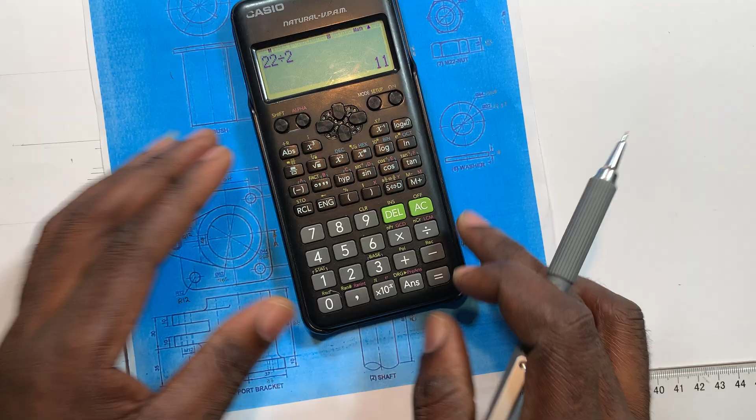So the diameter of the inner one is diameter 22. And this diameter 22, if you say 22 divided by 2, you are getting 11, isn't it? So take your drawing compass, open it to 11 millimeter.

This is 0. Where is my 11? Is right here. Not 10.5, not 11.5, not 12, but 11. Just close it a little bit. There is my 11 millimeter.

Then I'll come back to my top view and draw it faint. So there it goes, my 11 millimeter. You draw it faint with my 0.3. Then after I draw it faint, I will then take it vertically down.